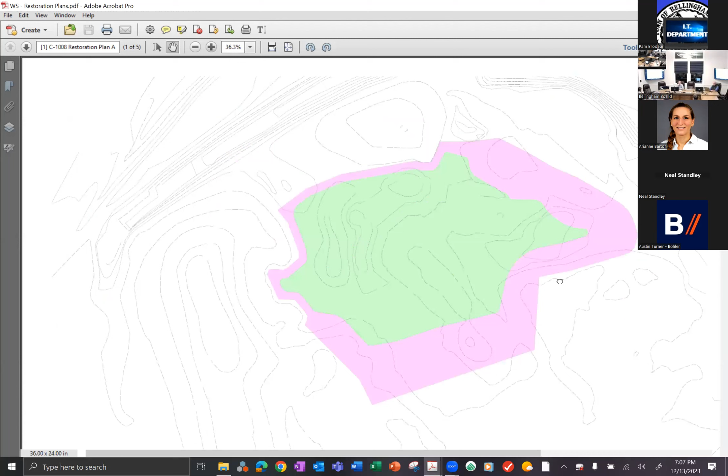So as we've talked about, and I'll zoom in on this a little bit, in this area we created, with some guidance from the commission and input from Matt, this undulating topography to create little tiny depressions in there and make it feel and function like a wetland system. It's going to be vegetated with a lot of different wetland species in there.

The purpose of our focus on the 27th was hydrology. We wanted to make sure there was a consensus on how this thing was going to be fed and supported. So this system here, as we've talked about previously, we're cutting it in, excavating down a ways, maybe 6 feet. The primary reason for that is to make sure we're intercepting that groundwater, because that's how most of these wetland systems are supported.

And based on what we know about the groundwater, the extensive test pit work we've done here, the gradients of how groundwater is proceeding, which essentially goes to that brook and trending towards 495, we feel really good about this being able to intercept groundwater resources and have that be a sustaining feature of the system.

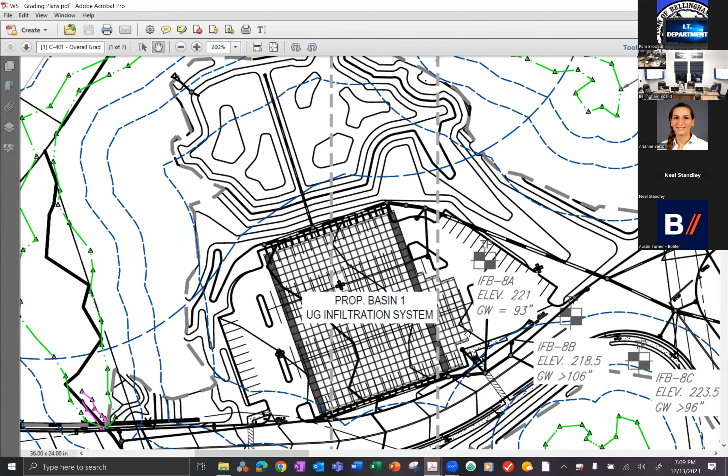Supporting that, we're going to have — I'll flip to a different sheet so we can see it. This kind of checkerboard looking deal, that's the underground system. So if you recall, where the mitigation area is now used to be a surface basin — that was part of the original design. As a result of our discussions and field walks, we said that area feels like it's much more conducive to a wetland replication area, so let's move the basin under the parking lot. The plans we submitted last week incorporate that.

Now, we talked about this at our last meeting. We have designed this stormwater system to be independent of the wetland mitigation area, so it meets the performance standards it needs to meet from a stormwater perspective without reliance upon the mitigation area. The commission and ourselves collectively didn't want that mitigation area serving as a stormwater feature. However, we acknowledge that it's going to be supported in part by the water that comes out of this basin.

So we spent a lot of time with Hannah, Steve, and Matt talking about how that would work, what that looks like. What we've done is, you can see this kind of vertical black line right here — that's the pipe we talked about, which is going to handle the outflow from this basin, which will then spread water into each of those respective pockets in the mitigation area.

As a collaborative team in that meeting, we felt good about this system being able to be supported by groundwater resources and stormwater runoff, which is infiltrated as part of this system, because the gradient goes from the bottom of the sheet to the north part of the sheet. And this system here, where my hand's moving around, is low enough where it will be receiving water in both capacities.

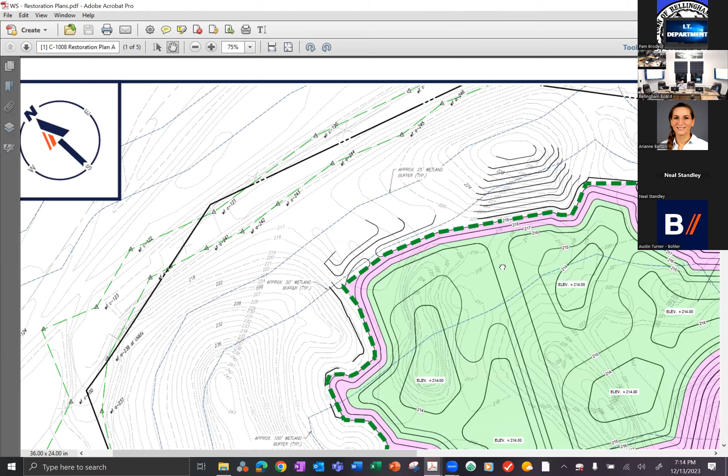What's the elevation of the bottom valve that you were just referring to, compared to the bottom of the system? I mean, in other words, how far above the bottom of the basin is this? Good question. So this system here is at 214, the lowest spot in that system. The bottom of the stormwater system itself is at 218.

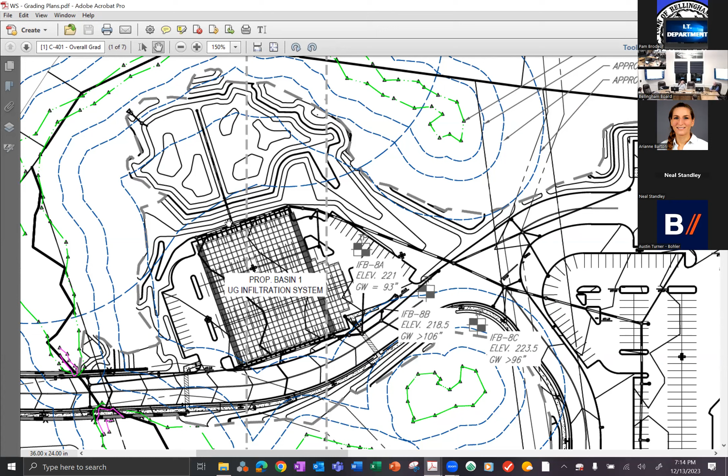This stretcher pipe right here is gravity fed out of the bottom. And then this pipe here, the spreader pipe, if you will, is flat. So it allows for this basin to drain via gravity until it gets to the spreader pipe, and then that spreader pipe distributes flow into the pockets.

And commission, have any other questions at this point?

Austin, there's no detail in the set that I could find of the mechanics of that adjustment system. Correct? So what we did is we embedded the details for the outlet control structure, which is the manhole, which controls the hydraulics. That detail includes a cross-sectional view of how the weirs are established and the holes in there and everything else controlling hydraulics. That detail is embedded back in the construction details for the set of plans. It's probably nondescript, I suspect it's called like OCS one or something. That detail is embedded where? In the overall site plans, in the very, very back.

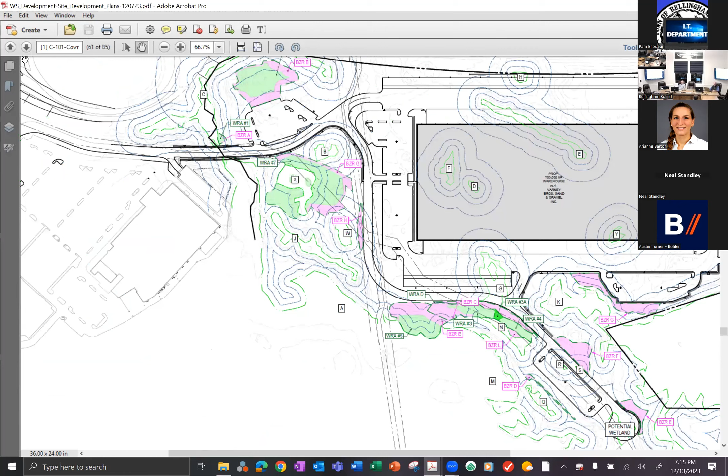Let me see if I can find them here. This file's quite far in the paper set. Yeah, I do have it, let me send it to you.

While you're looking that up, hypothetically, the project is completed and has been running for a couple of years, we've passed the monitoring period. These valves and so forth, which might be beneficial down the road, are in place, but somebody is now owning and running the site and responsible for knowing where they are, how they're working, how they're supposed to work, and actually making sure they're utilized if needed. How do you anticipate that that would happen?

I think the idea we were talking about at that working session was that, let's say the monitoring period is 3, 4, 5 years, whatever it may be, over the course of that period of time we're using that period to dial in the system and find out where its operating sweet spot is, acknowledging there's going to be seasonal variations. That's kind of unavoidable, but finding out where it's functioning best, and then allow that monitoring period to be when you essentially set it and forget it at that point. I'm oversimplifying it, but that's kind of what we discussed at the meeting.

But those would need to be maintained, so we would need a fairly robust O&M plan on that system as well - the voice of God being Neal Standley just spoke, right? Yeah, so it's 904. Oh yeah, 904. Godlike, but not quite, yeah.

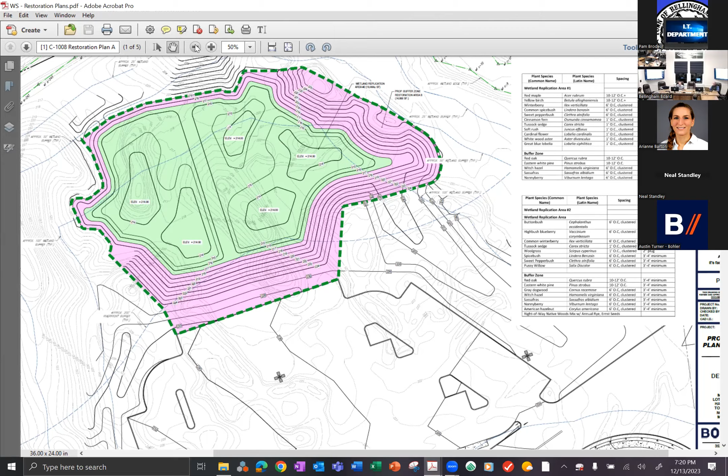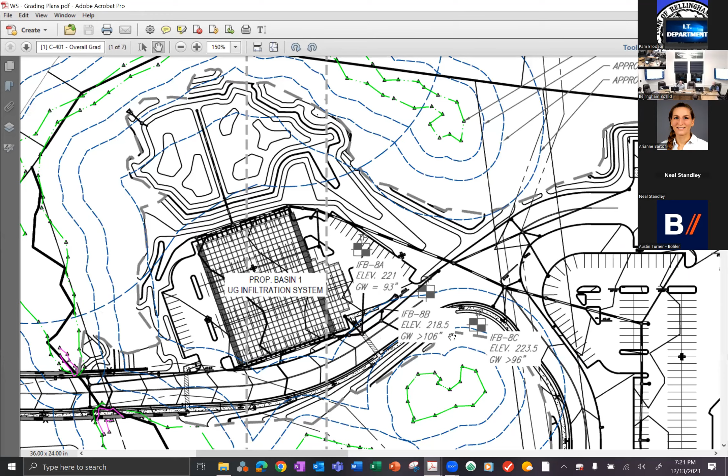Could you zoom out for just a second and show the area you were at before you zoomed in there? A little bit more, so we can see the lines coming into it. What area are you talking about? The storm basin piping, showing the piping coming from the parking lot, right there. Okay, if you zoom out a little more, I see the parking lot to the right of this on the visual screen.

Those pipes are going into it, it's pretty apparent, and it looks like the large parking area in the back has some feeders to it. Yeah, so the watershed for this basin includes this part of the driveway that comes down, is collected and put in here. And then this side parking area here is what's contributing to this system.

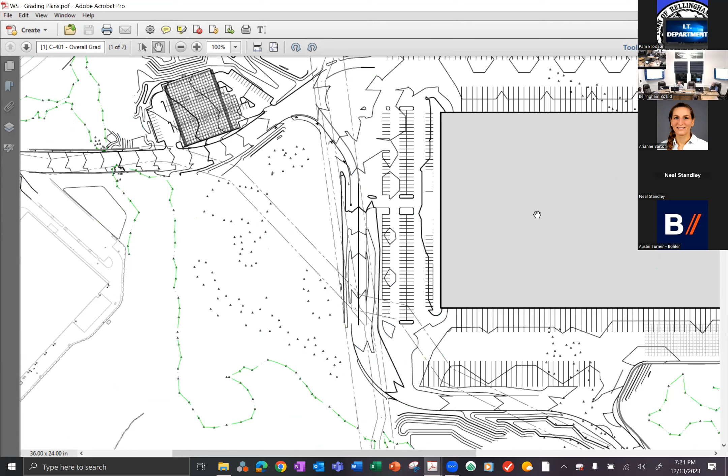Okay, then if you move your cursor to the right... I'm just going to zoom out for you. Okay, so there's a connection, scroll up a little bit please. So there's a Y shape right where the road curves between the parking area, up to a little spot right there. Isn't that a feeder pipe? Yeah, so this small part of the driveway right here, this little run comes in there as well.

But doesn't that continue to the right, take a turn, and run across the whole length of the back of that parking area? No, what happens is this right here is a high spot in that loading area. So this runoff goes this way, this runoff goes this way, and then this goes to a separate system in the back of the building.

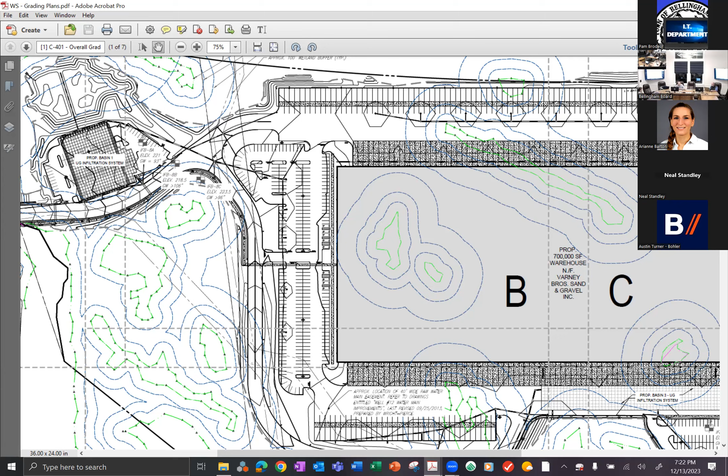They don't put little arrows or anything helpful, huh? Okay, I just... when you say 'they,' you're referring to me? Well, I'm trying to be polite, keeping it anonymous there, come on, but you called it out, so... you know.

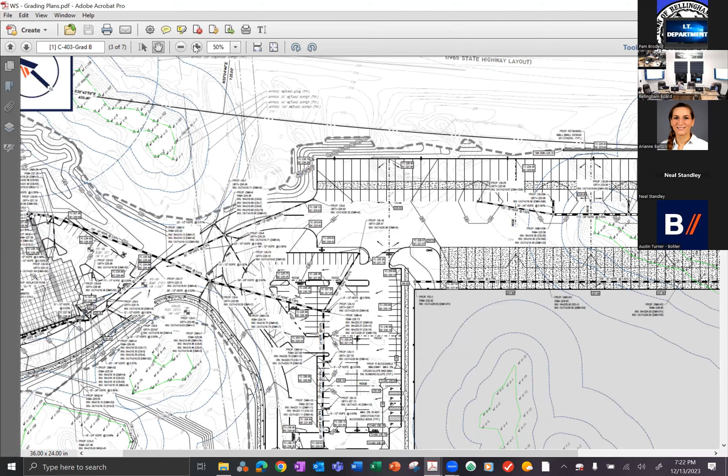So I'll tell you, this is the overall plan I'm using because it's easier, but if you want to go here, this has all the elevations on it that shows you where the flow's going. And I have flow arrows in it too, look, I did it for you. Look at the arrows right here, see these little magic arrows. I'm going blind, you keep flashing like that. Sorry, I'm trying to give everybody a seizure.

All right, okay, I see this, so the squiggly arrow about ten spaces in, is that what you're referring to? Yeah, these are directional surface flow arrows. Yeah, that's helpful, okay, I hadn't zoomed in on that detail.

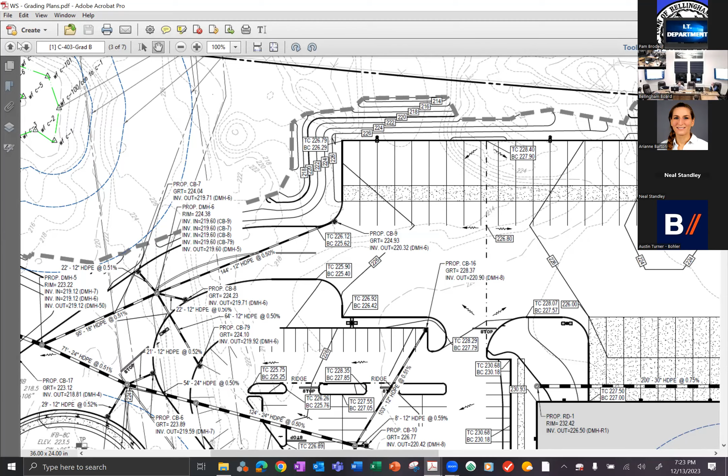So again, a question: could you zoom back out to the level you had a minute ago, the overall building and the approach road? Now I'm defending myself with that sheet, now I have to go... all right, there you go.

A little bit more out, okay, so to the left of the plan there, crossing over the Charles River feed. You looking over here? Or I'll come back left, sorry. The other left. Opposite the right, left - yeah, there you go.

So that area is feeding as well. Basically what's running downhill from the former cart path, when it goes up towards the Home Depot entrance road and so forth, is coming down. And where's the feed to the infiltration system?

Right here, you can see there's a structure, and this shaded section - that's what I was referring to as the isolator row. It's a special fabric that goes around the system. There's curbing to keep it from going into the wetlands, between those two areas. The road and the approach is fully curbed, so the catch basin sits against the curb and that gutter flow.

I'll ask this question to you and Matt and Hannah and Steve, since they were there. Did you guys discuss at all what I brought up about five times now since we started talking about this? Absolutely. So how was that addressed? See if you can remember what it was.

Oh yes, thank you - the chemical treatments of the roadway. Yeah, I believe it was mentioned, I said we all know Mike's gonna bring up salt. I haven't heard an answer yet, so I'm just looking until I get one. Maybe there'll be a good one, who knows?

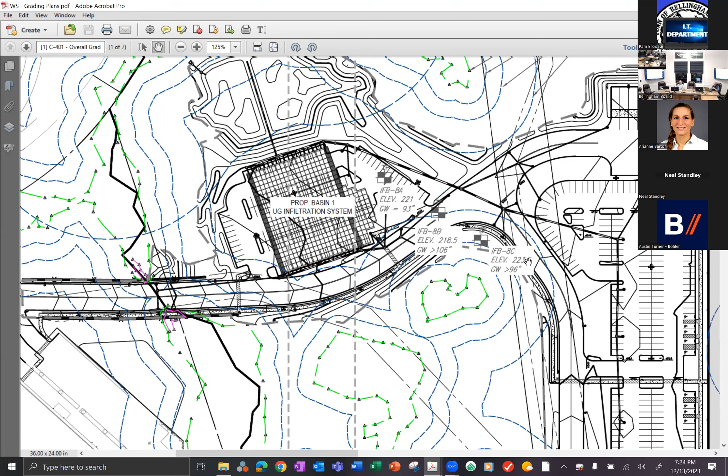So we talked about a couple of things, and what's been employed at the other centers, including Charles River Center, is a non-sodium based de-icing agent, which is far more environmentally conscious, if you will. That's being employed - I think WS actually employed that. Those are in the orders of conditions for each of those properties, including the most recent one at Charles River for the repair of the retaining walls, which mandate an ongoing use of a non-sodium de-icing agent. But we'd expect a similar condition here for this project as well.

That's a condition for whoever is running the site and maintaining and operating it. You aren't going to continue to operate it forever, correct? It's a condition that runs with the property - embedded in the permit. So whoever's operating the site, and we do intend to operate it, would have to operate in accordance with the permits. And while non-sodium de-icing agent is a nice term to use, I'm not a chemist, so I don't know exactly the details of what's in it versus sodium.

It might be less harmful to wildlife, in particular aquatic wildlife, but you are crossing over right at that area, a tributary of the Charles. How does the - I forget the name - the group most affiliated with the Charles River... Charles River Watershed Association, thank you, I didn't want to say it all.

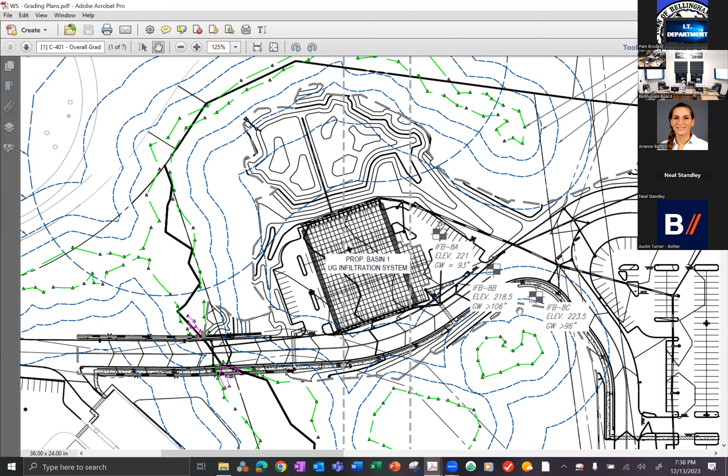Let me take a second - Steve, you feel that's okay, directed by Matt, as long as he's ready and not uncomfortable having his questions answered in that format? Okay, anybody online on the Concom have any input on that? You feel it's a good thing, or not? I'm okay with it. Noel? Yeah, that sounds good. I'm comfortable with that.

How about you, Neal? I just want to maintain that line of not designing the project. Right, it's understood that the information Matt would be getting would just be information he'd incorporate into his review, as an impartial third-party peer reviewer.

Mike, can I just address Neal's comment? Neal, can you hear me okay? Yes, sir. I can say confidently, in all the workshops we've attended with Hannah, that we did not, nor did Matt, steer any of the development other than inquiries, curiosity questions, tossing of ideas. It was a real collaboration. At no point was direction received by the design team from any of the three of us as to what should be done. Would you gentlemen agree? I would very much so, yeah. And thank you for saying it. I think that's great.

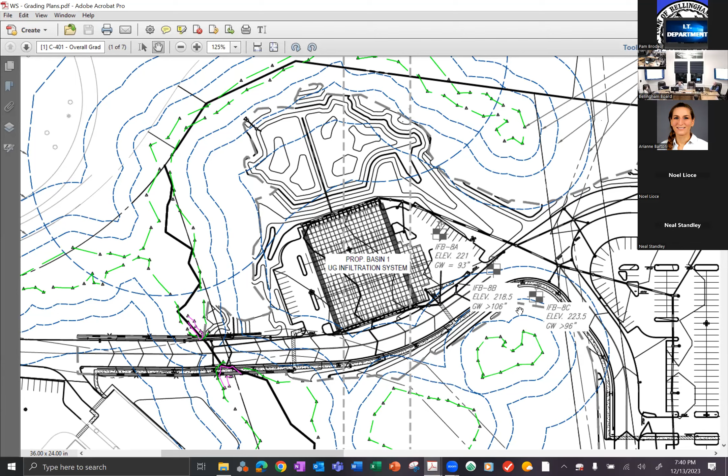Thank you. Okay, in the interest of time, if you got your questions answered, Austin? You good? Yep. Okay, so Matt, you're good with this? Yes. Okay, so I'll accept the motion to continue the hearing for the warehouse project at 217 Hartford Avenue to the evening of the 24th, until 7 p.m.

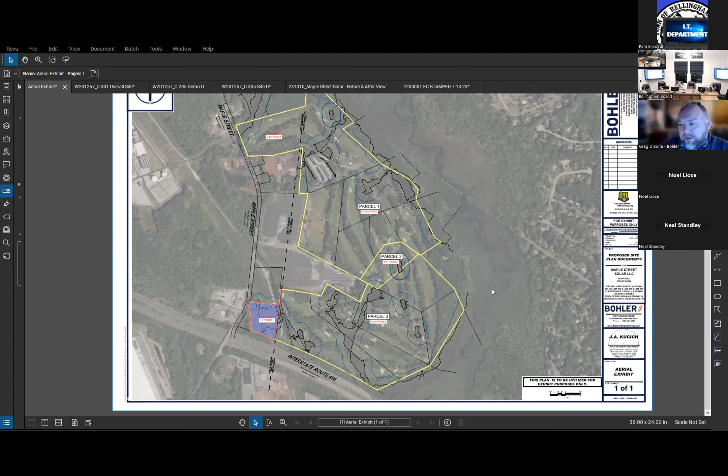We understand this is obviously our first meeting. We understand that I don't believe a site visit has occurred or any sort of peer review has begun yet on the project. But our hope is that after we give our outline tonight and talk through what we're looking to do, we can then discuss the next steps and actions needed to continue to move the project forward.

And for reference, where we are on the planning board side, just so you know, we've been in front of Bellingham Planning Board presenting this project initially. We have an upcoming meeting that we moved to January to continue the conversation. And likewise, we are also simultaneously running permitting through Franklin for the southern portion of the project as well.

So what you see in the yellow outline actually is the boundary of the overall Maplegate Country Club. It's noted on the plan as parcel 1, parcel 2, and parcel 3. Parcel 1 is being redeveloped under a separate project that also is for solar, but not affiliated with what we're doing as part of the parcel 3 development.

In the middle of the site, parcel 2 is actually a dedicated open space that will not have any solar development on it. It's about 5.6 acres of basically preserved green space that's going to remain, separating parcel 1 to the north and parcel 3 to the south. There will be an access driveway connecting the two properties in between. Beyond that, no structured development on parcel 2.

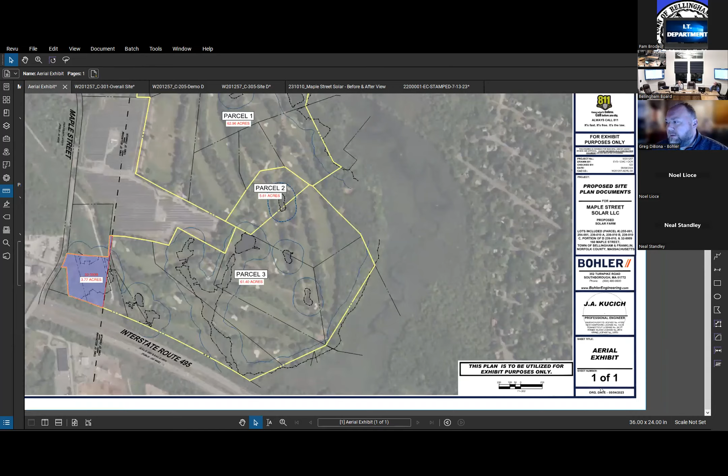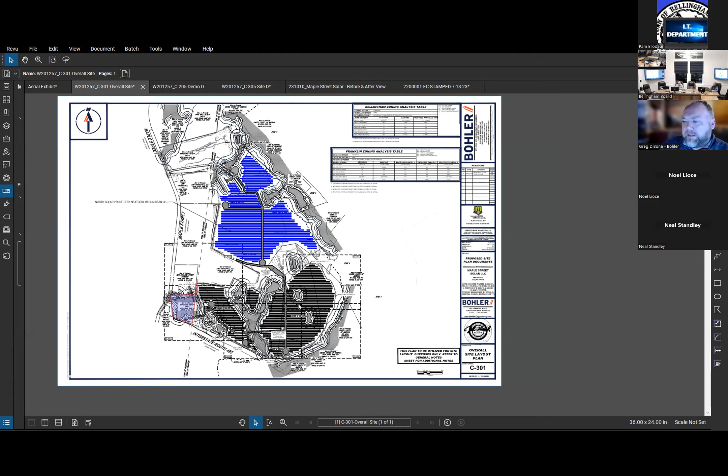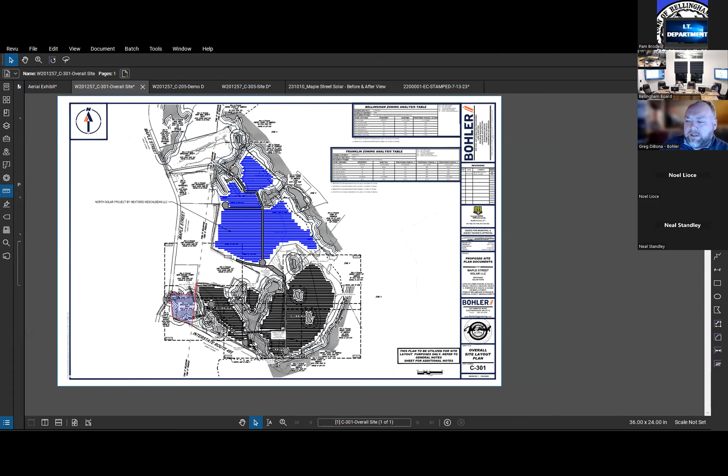The next plan is an overall site plan that's part of the submission. I'm showing this to give reference to what's happening in the north, shown in blue. That's a separate application in front of Franklin planning, not subject to conservation review for Bellingham—filed by Next Grid Mescalvian LLC. Our application is everything shown in black and white at the bottom, but you can see how the two interact. There are two large solar fields and a continuous gravel access road providing circulation for fire, emergency access, and maintenance through both solar projects. For clarity, I've highlighted in purple on the far left the lot itself located within Bellingham.

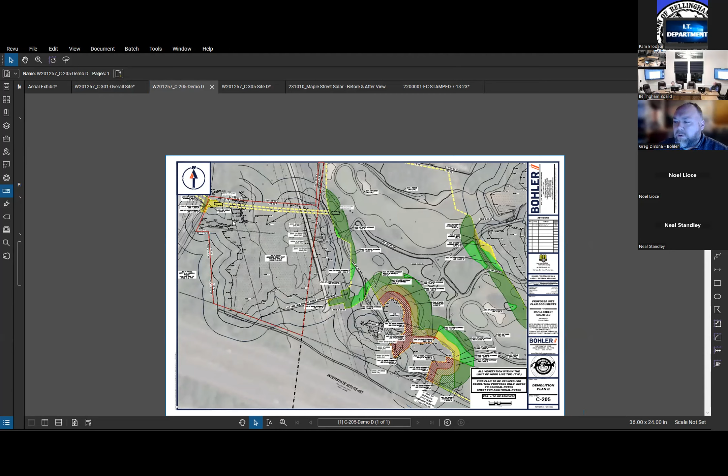This next plan is the demolition plan, also part of the submitted set. I'm going to zoom in on the area where we're proposing disturbance and improvements, and talk through it in a little more detail.

As I zoom in on the site, with a red boundary around the 32-9 lot, what you see in yellow hatching is the limitation of tree clearing and disturbance within the wetland buffer. The majority of the site is primarily wetlands, as shown by the wetland delineation flags and offset boundary lines delineating the 25-foot no-touch, 50-foot, and 100-foot buffers. Portions of the 50-foot and 100-foot buffers from the wetlands encroach outside the site, all the way into the frontage along Maple Street.

To support the electrical connection and tie-in for the proposed solar array, which will be located on the Franklin side of the project, we require electric connectivity back out to Maple Street. This would be provided through two overhead utility poles and a ground-mounted recloser pad, which I'll get to in the next slide. We do require some disturbance within the wetland buffer, including tree clearing and restoration along the already-cleared frontage of the road.

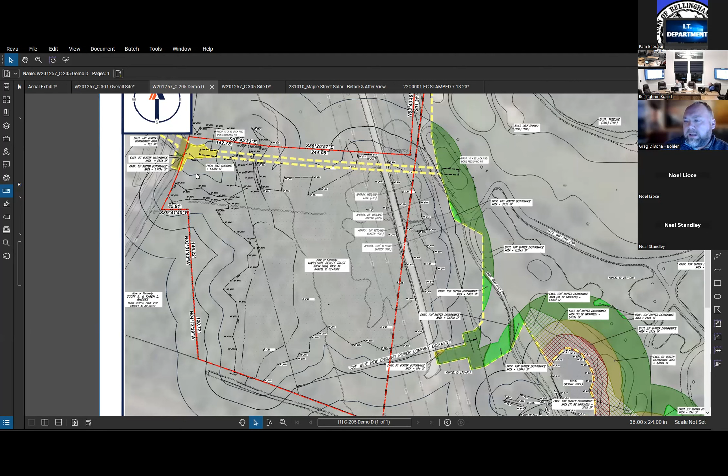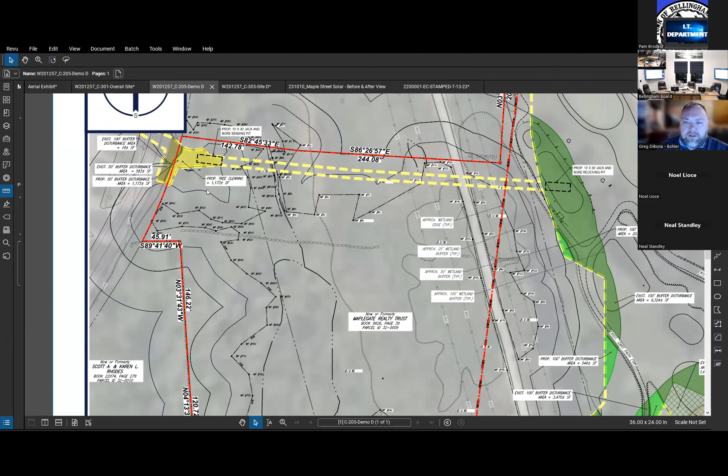I have a before-and-after exhibit I'll show later that gives a good idea of the pre versus post condition along the Maple Street frontage. This area is roughly a little less than 1,200 square feet of existing vegetation within the 50-foot wetland buffer that would need to be cleared, allowing space for the overhead lines and a future gravel pull-off shoulder, so the utility company has a designated area off Maple Street to service the poles for future maintenance.

The area shown in that dashed yellow line reflects what's happening underground. We're intending on spanning the wetlands and the New England Power easement that includes a majority of the site, using the jack and bore method to drive conduit, sleeving underneath the ground, and then feeding conduits through for our electric connection.

That thick dashed line in yellow will not have any above ground disturbance. The call outs for the sending and receiving pits are noted on the plan, delineating roughly a 10 by 30 foot area that we utilize to create those pits. This was all done in an effort to reduce the amount of impact and disturbance to the wetlands, keeping activity within the buffer areas and not disturbing any wetland areas.

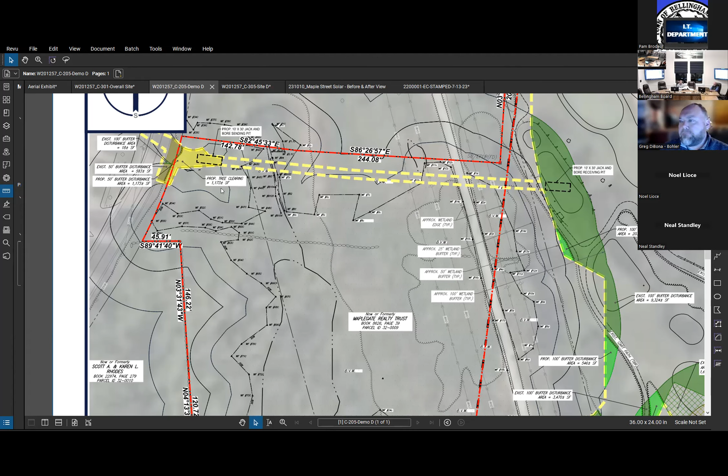Now I have the site plan, the site layout plan D, which was part of the submitted set. The only difference here is I added a little bit of color for tonight's meeting, just so it's a little easier to represent on screen. Black and white is sometimes hard to see on screen. So zooming in here, I highlighted in purple where the above ground disturbance limits are.

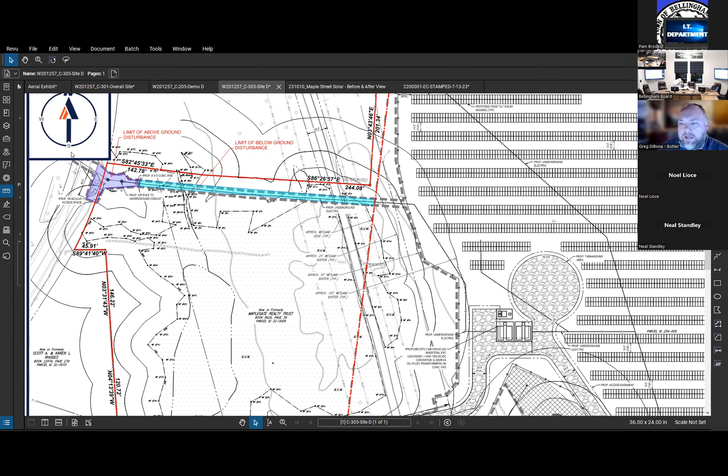You can see in purple the two utility poles, with overhead lines spanning across Maple Street to two poles. There's about a 4x6 concrete pad with the recloser equipment, and from that point on that equipment is all underground, from the pole to the recloser and to the other side. In cyan, we show that same area as conduit, all underground, so we're calling it out as a disturbance area, but it's all underground disturbance. We don't expect any tree clearing within that area.

The area I mentioned before with the gravel pull-off area, or the gravel shoulder along Maple Street, is roughly 11 feet wide by about 30 feet total. It flares out, so it's 40 feet along the front edge and then 20 feet wide where a vehicle space would end up being. This isn't something we really intend on using, it's just a requirement to make sure the electric company has access to their poles.

After I go through my explanation of the project, Dan will talk a little about the wetland delineation work that was done and our request associated with the NOI.

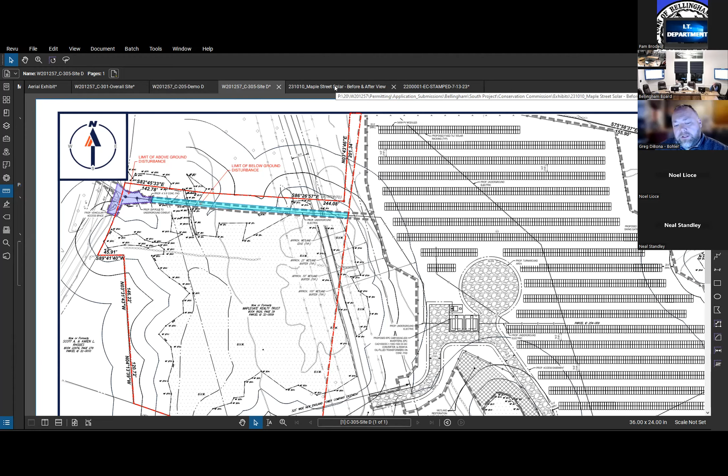That is correct, you're looking northbound on Maple Street. After you come over the overpass, as if you're heading up Maple Street, like you're going to the golf course, which is further down on the right-hand side.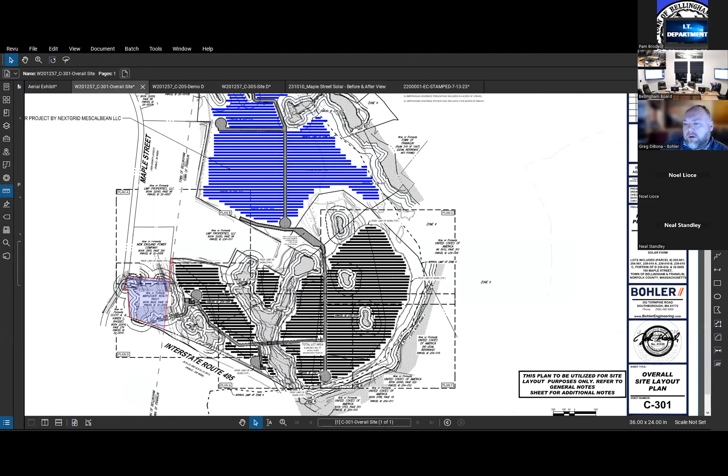From this point, so the access road - where we are on the overall plan, we're right here, actually where my cursor is, which is how to describe this on the plan. It's just kind of in the lower left hand section, right along the frontage of this lot.

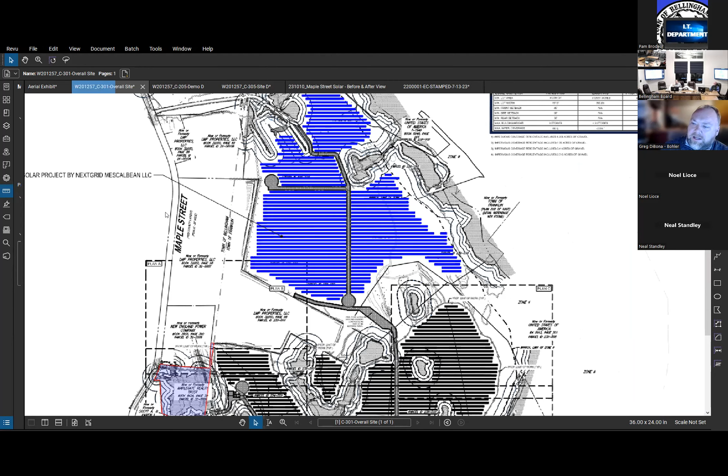The driveway itself that goes into the golf course is up - roughly, I'd say about 1,500 feet. I can probably get a real measurement for you in a second here. Thank you. Yeah, but that's the existing lot right on 26-9. That's the opening driveway today.

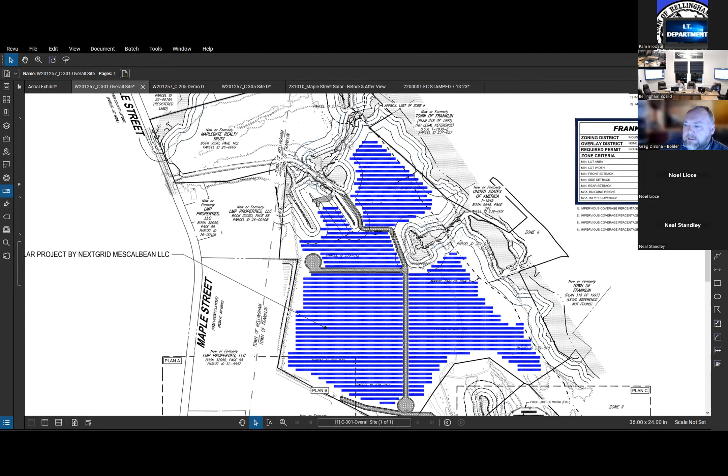So on this lot, about 2,200 feet. On this lot, we are not proposing a new driveway. We're just - all the vehicle access will come through the lot to the north.

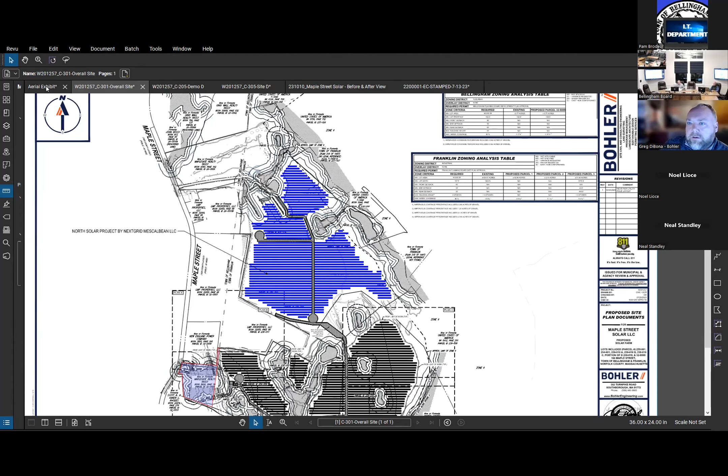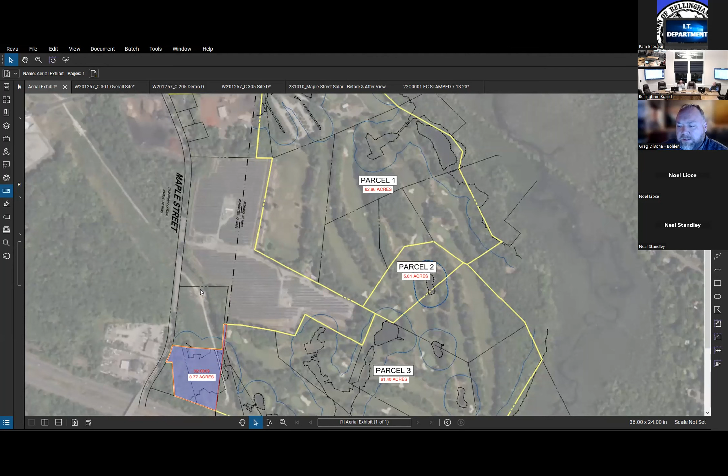If I go back to the aerial exhibit, there is another solar project that exists today along Maple Street, kind of almost separating the two parcels from the north and the south. No affiliation of ownership between our project and theirs, but it's worth noting that this stretch along Bellingham and along Franklin currently does have a separate solar array. And the other lot right directly next to us, which you can see even clearer on this aerial, is the clearing easement from New England Power, who has a pretty wide easement line for transmission poles that run through the majority of that lot.

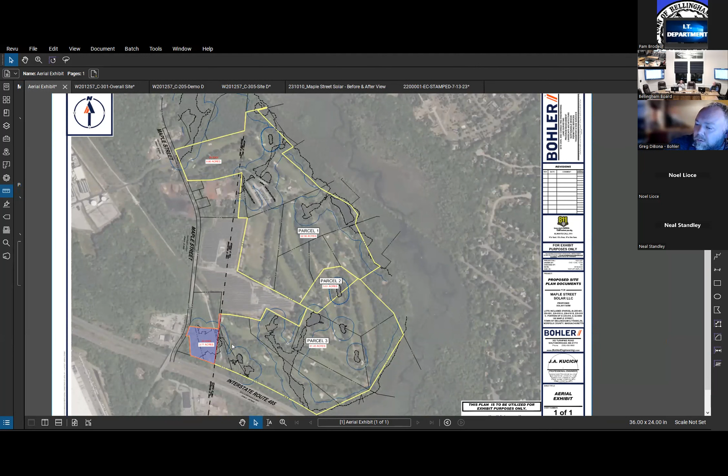So that's as much as I wanted to cover, just from an overview, understanding the project and the disturbance level within this lot itself. I can have Dan jump in for a couple minutes. Dan, if there's anything specific you want to talk about in terms of the wetland work and what we've done out there. From our standpoint, we just like to know the next steps - whether a field evaluation site visit would be needed, and if you thought a third-party review would be warranted to go and evaluate the area of disturbance.

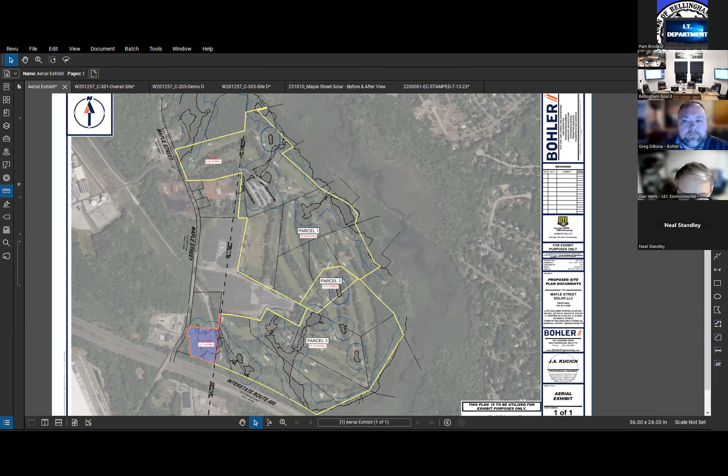Dan, do you want to steer things? Yeah, if you would share my screen, I can show you a zoomed in view of the wetlands. I'll ask Pam to take care of that, please. Thanks, Pam. All set.

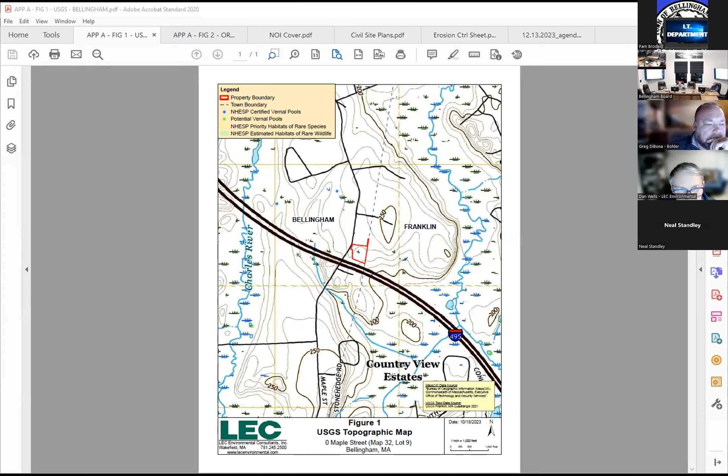Thank you. Great. So this is an overview, just the USGS map of the vicinity. You can see the project sites highlighted in red, and you have the Charles River over to the west. There's another unnamed perennial stream to the west, and then way over to the east in Franklin is Mine Brook. You can see there's no mapped perennial streams near the project.

This is an orthophoto view, kind of zoomed in more than Greg was showing in the overview, but you can see there's the existing golf course and then that wide New England Power easement. You can see the power lines and then a wide swath of cleared area. And then you can see the western half of this property is pretty much all forest - most of it's forested wetland.

And then the connection, just so you can see on here, right about - that underground connection is going to go right on the northern edge, so kind of right through here, and then tie in just right around in this area.

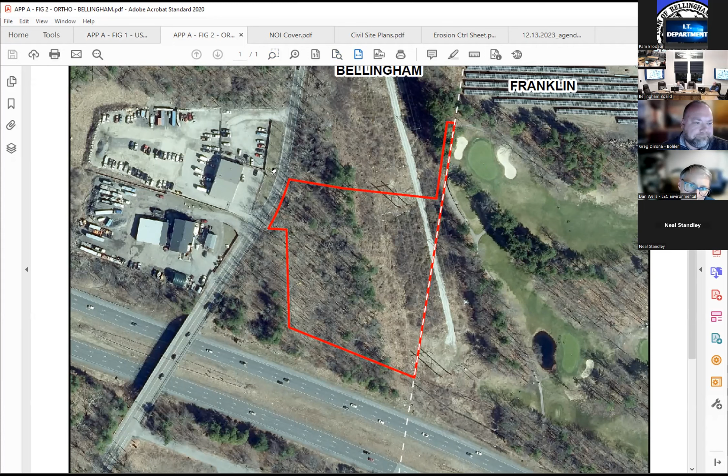This is just an aerial drone view of the overall area. You can see the cursor is right in Franklin. That's right about where the underground pit is going to start, and it's going to cross just above this tower, I think, so it's going to run kind of straight through here. You can see then it goes under - there's kind of a pine forest, and then that's when it goes into the wetland, the forested wetland, and then it connects in right about in here. So that's kind of what the whole landscape looks like.

I'll show you the wetlands on the plan, but in general, there's a kind of shrub swamp wetland on both sides of this access roadway. It doesn't get flooded or anything. There's no vernal pools over in here. But this seems to drain kind of westward and then into the forested wetland. Then there's an intermittent stream system that kind of flows north to south down through here.

And then I think it might even go under 495 eventually. But in terms of the impact, the buffer zone impact is going to be way over next to the road. This is kind of a marked up view of the wetlands.

The orange line is bordering vegetated wetland, and this light blue area is the intermittent stream. You can see that by doing this underground alternative, the project avoided a tremendous amount of tree cutting to run poles through here. So it's really the best possible approach from a wetlands and buffer zone perspective, avoiding a lot of impact to the buffer and tree clearing.

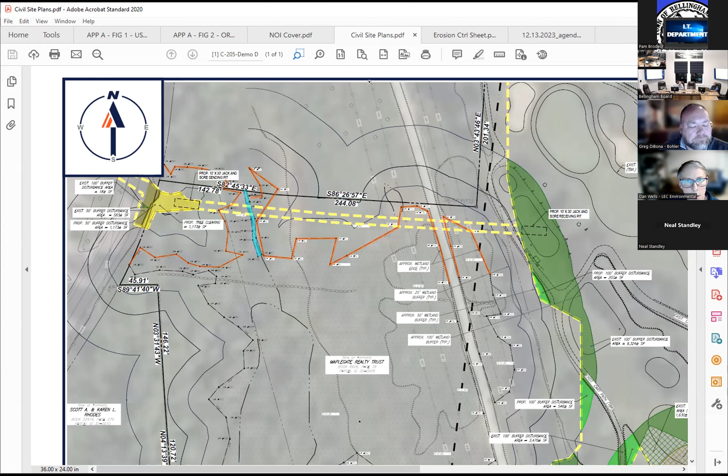Greg showed you the erosion control sheet, so I was going to zoom in here. There's going to be an erosion control barrier put around all of the work to prevent any sedimentation into the wetlands. As Greg mentioned, everything's been placed at least 25 feet away from those wetlands. There's not much room because of the road being so close, so we couldn't avoid that buffer zone alteration completely, but that is essentially the deal with the wetlands and buffer.

Could you expand on your conduit installation method a bit, please? Is that something, Greg, you're going to take? One of our commission members, Steve, would like to know more about the boring method.

Yeah, sure. So the jack and bore method - we've reached out to one of our contractors working on the project that's worked with the NextGrid team previously on other solar installations. What they'll do is create a sending pit, basically a pit where you have equipment that drives steel casings through the earth underground, usually around 8 to 10 feet in depth. They'll drive 20 to 30 foot casings at a time through the path, and can do an entire span of up to around 400 feet, which is roughly what we're proposing here. On the other end you have an equivalent size receiving pit to pull out the sleeving, and what you're left with is a steel encased opening roughly 8 feet or so below grade. Within that encasing is where you feed your conduits through to make your bank of electrical run underneath.

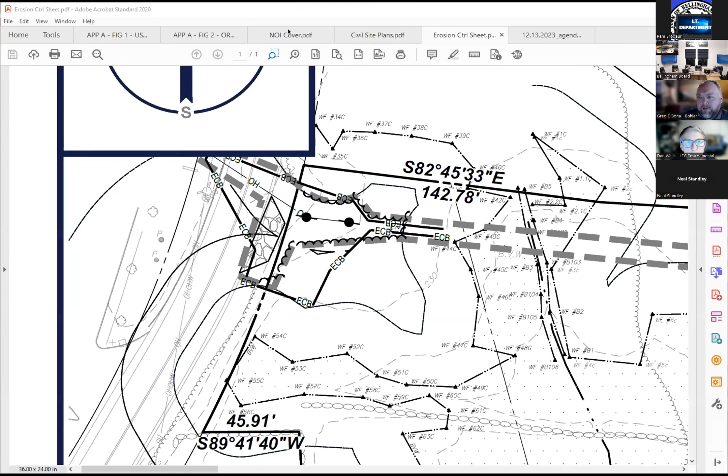Can I ask, you go back to the drone aerial view of the site again, please, Dan? Where you were connecting across from the vehicle repair shop? So you're not going across that gray line utility easement? One side of the pit would be right here in the existing golf course, and it would go underground, and then connect into here. That's what we're looking at.

So the boring method saves you from requesting access. That's correct, yes. We are not getting other access through that easement.

And we did look at that wetland, that little triangle on that picture where the pines run along the edge of the utility easement over to the road. We did look at that a few years ago as part of the Maple Street drainage work they did further north, looking at that as possibly creating a basin in there. So we have looked at that area in the past, just FYI.

Might have preceded most of the current Concom members too. Yeah, it wasn't that long ago. Probably 5-6 years ago, maybe.

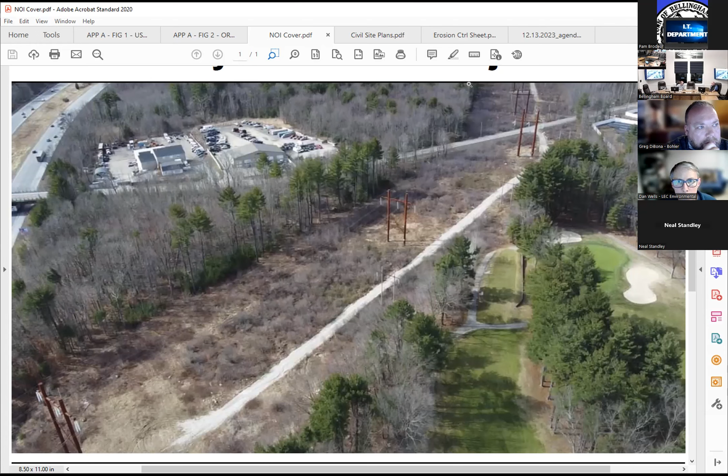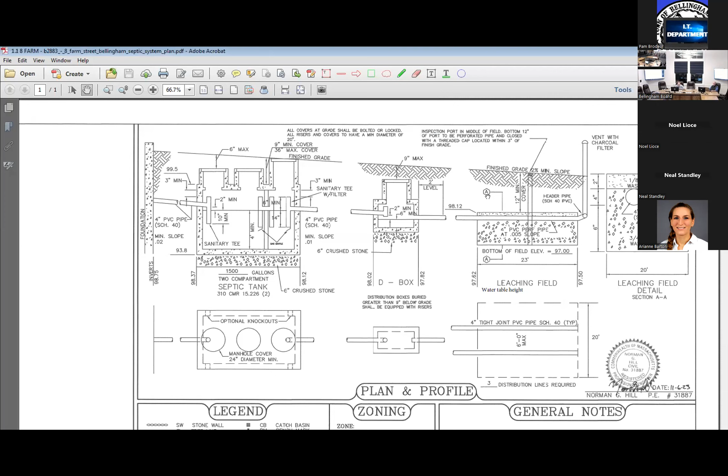I can't get in the portal either, but I forgot my username and password, so that's my bad. This is the drawing as a whole. You tell me where you want me to go, Mike.

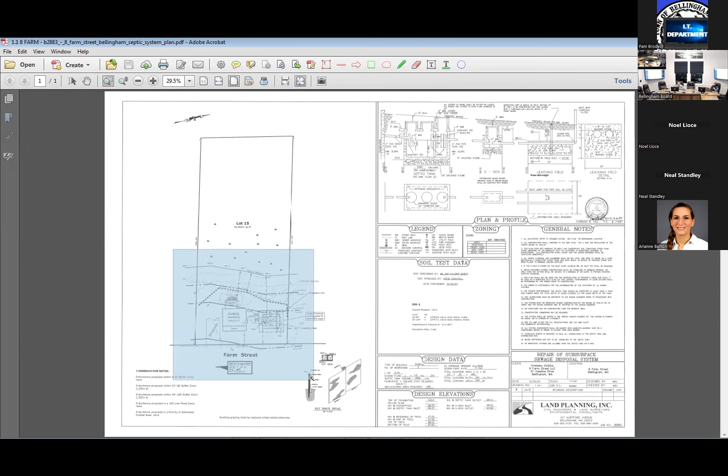Can you zoom in on that real tight, Steve? Which half, the house? The front half - the back half is just wetland, we don't really need to see that. There we go, beautiful, that's perfect. Okay, so the tree line you're talking about, is that the bars and dashes? The scallop line. Okay, quick term.

Okay, so the area within the solid heavy dotted line, is that the erosion control? Yeah, the heavy dot is erosion control, correct. What are you proposing for that? We're looking at a silt fence on posts. That's nice and solid. How's the pitch there, it's almost flat? Yeah, it slopes a little bit, kind of parallel with the back of the house, and the backyard's pretty flat.

You're moving the septic to about the only place it can be, given the driveway and the tight property line on the left side. Is the proposed house sitting on the existing foundation, or is it expanding beyond the existing house? The new dwelling says existing, but there's no dwelling since you said it burned down, so they're building on a foundation. My question is, are they expanding the foundation?

No, it's the same footprint, same size, same vertical. Got it. The only thing they're expanding is putting a deck in the back. You can see it on Google Earth. It doesn't cantilever out over the foundation.

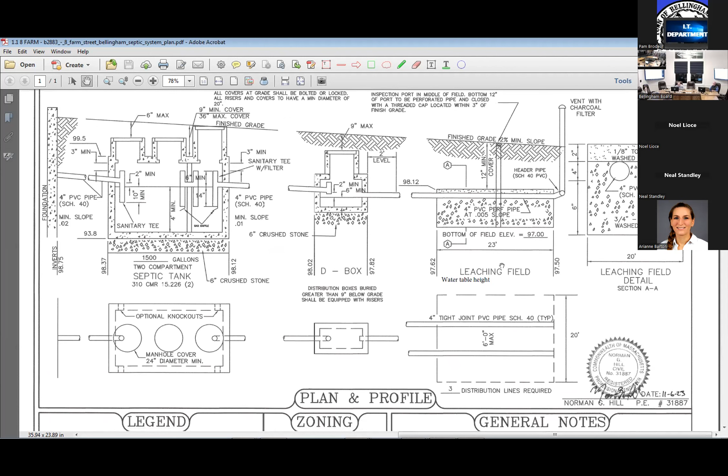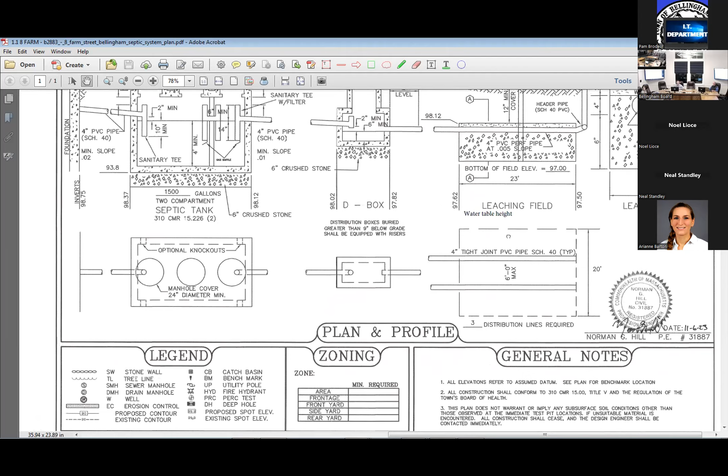We put a little clip over that. So did you need any waivers? No, not on this one. That's rare, huh? I said it's a first, but now we know it's not a first, Pam. No, but it's in the top 10.

All right, additional questions for Bill or from the commission members? Anybody have any other questions or thoughts on this? You've got the DEP number.

Do we want to consider throwing in a couple of posts with badges, Mike? That's never a bad idea. The applicants usually don't seem to mind, given the proximity and the fact it was a disturbed area. What are you thinking, what's the span, about 125 feet? Maybe three posts with badges spaced along, just as a reminder to the future homeowners.

Not to go beyond the 25. Do I hear 6? Do I hear 4? Do I hear 5? Do you guys have any sense about how many feet apart? It's 125 feet, so 3 would be about 45 feet apart. Maybe 4. Okay, I think that's a good idea.

Anybody else have any other thoughts, ConCom members? The usual post, you get that, should be fine, 4x4, whatever. Around. Probably put them right at that tree line for location. That's close enough to the 25, but marked 'do not disturb.' Looks like it parallels pretty close.

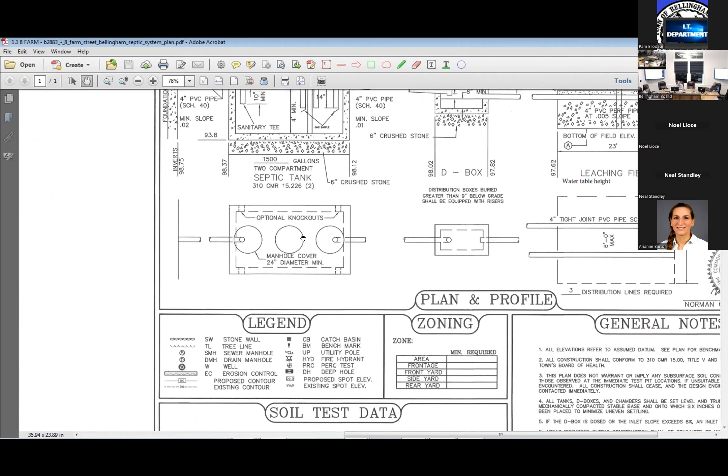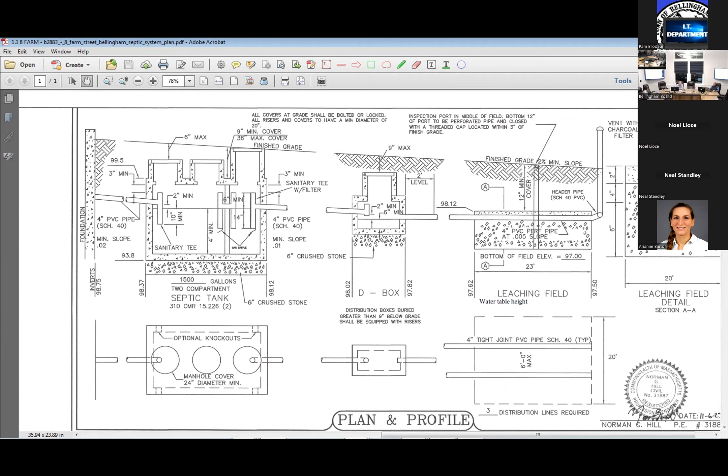So I will accept a motion to provide the limited condition to approve this septic system replacement. We have a DEP number, even though it's not shown on the agenda. I know, Hannah said it is on record. So I accept a motion to approve that.

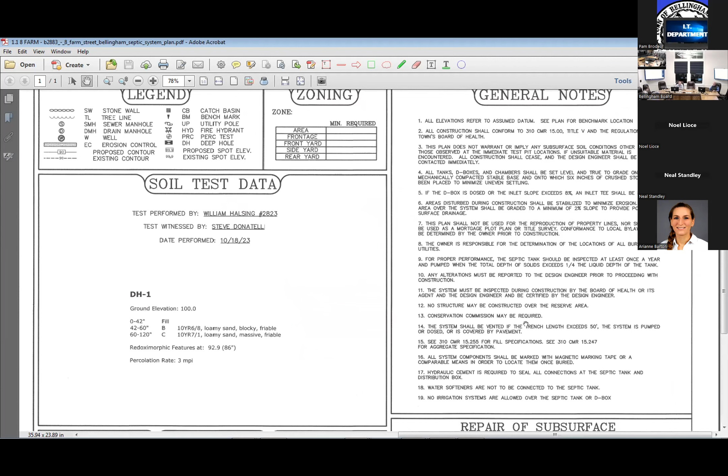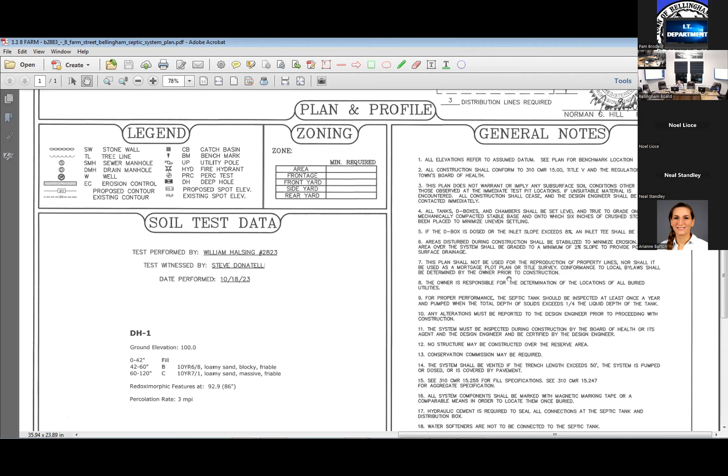Are we going to want the update? Oh, we're going to put that in the conditions. Never mind, sorry. Wait, what? But what in the conditions? The posts. Oh, the posts, yes. We don't need to show them on the plan, we don't need a revised plan with those shown — we can just put that in the conditions.

Right, okay, so with that amendment to the order of conditions, it is the standard order of conditions. Does anyone have any other comments or questions? I'll accept a motion to approve the construction of the new septic system.

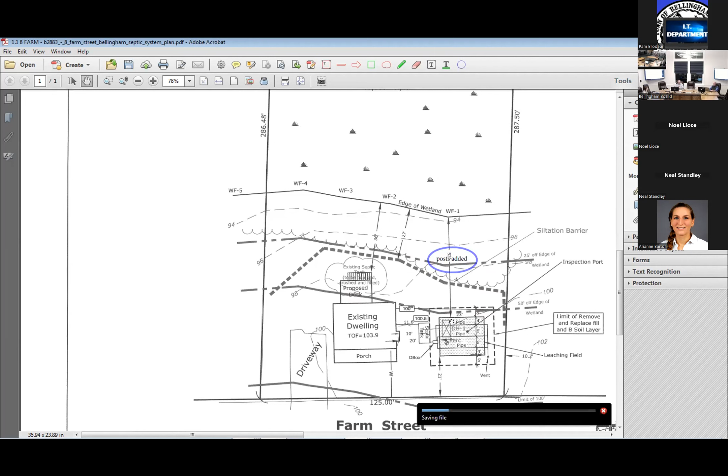Sorry for the delay, glad to get you out of here before. We could pretend it took a whole half hour to talk to you. We usually just stop that other thing.

They have a first amendment right to say that, no, we don't want that in our... Under other business, we're gonna jump to 187 Farm Street, Concom members online. We have an order of conditions extension. Bill's housing is involved in that, so we thought we'd ask him to hang out for a moment.

He came into my office asking for extension. Background, you guys saw 187 Farm a number of years ago. Which property is this again, Bill? The one up by Stallbrook. It was Matt Vasolino's property, 187 Farm, across from Asphalt Engineering.

Hey Pam, is somebody not on mute? Yeah Pam, actually we think we're hearing Pam's monitor. Thank you Pam, she's muted now. That's okay, sorry Bill, go ahead.

So it's opposite asphalt engineering, and why do we need extension? The order of conditions ran out. Have they been doing anything on the site? Yeah, Matt's been working on it since he got it.